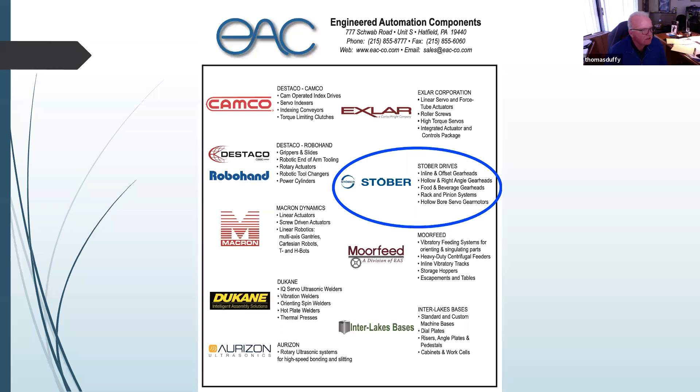The three principles right up on the screen, what you see now is my line card - these are the companies that we represent. We've been in the controls and automation business. I've been involved in it for the last 38 years, so we have a lot of expertise, and our expertise is in motion control, just as yours. I'm a mechanical engineer, we also have electrical engineers on board, but we bring the mechanical solutions to you to make your selling much more effective.

The first principle we're going to cover here is Stober drives, and Stober is an Encompass partner with Rockwell. They make a broad base of gear reducers - precision gear reducers, right angle, planetary, rack and pinion, and such. The neat thing is they make a very broad array of units, including our F-style, which is a parallel inline, offset inline - a really unique piece of equipment. We bring a very broad base to you, which allows you to solve all your applications, so we're looking to be your one-stop shop for solving your reductions.

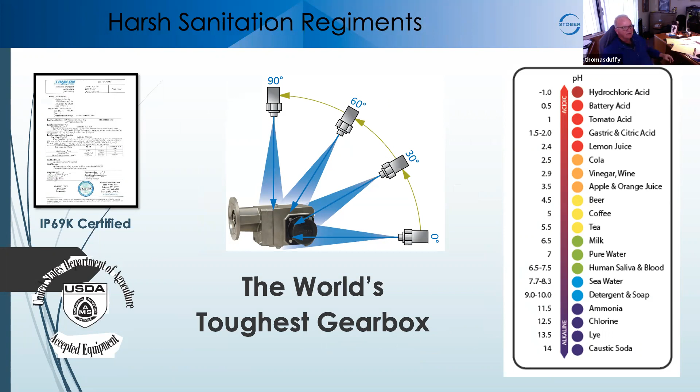We also make some special drives, which we'll get into - hollow bores and inline gear motors. One of the really great things about the Stober reducers is they're very tough, very industrial. They can take a lot of different harsh environments, including versions that are IP69K for food and wash down applications. We also put a bunch of different coatings on - our standard coating is non-wash down, but we also make corrosion resistant for nastier environments. Food duty is for severe wash downs, caustic sprays, and such.

We also make full stainless steel units. The interesting thing is we also get involved in explosion proof units. You don't normally think about reducers being explosion proof because mostly it's on the electrical end, but they're ATEX rated. They do come in handy - reducers can get very hot, very warm, and that's why we went out and got ratings. We do a lot of work in the process control industry - oil and gas, power generation, gas and oil transmission through pipelines - and they're looking for explosion proof, so Stober is a really good addition to your motors and drives for those industries.

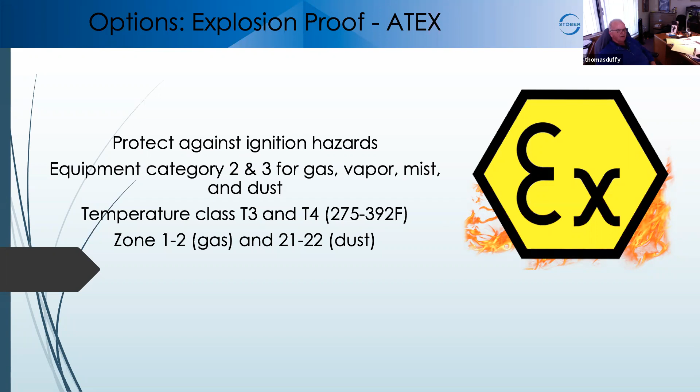They're very, very precise, very accurate. In a lot of cases, we're less than 1 arc minute of backlash, very high torque. We also have lower cost inline planetaries if you get into an economic situation, but they're really designed to be robust and tough.

We're the actuator of choice or the reducer of choice when they want long life, low cost of ownership is really what their mantra is. So we may be a couple more dollars on the front end, but we'll last a lot longer, and you'll see that when we show you our warranty at the end of this presentation.

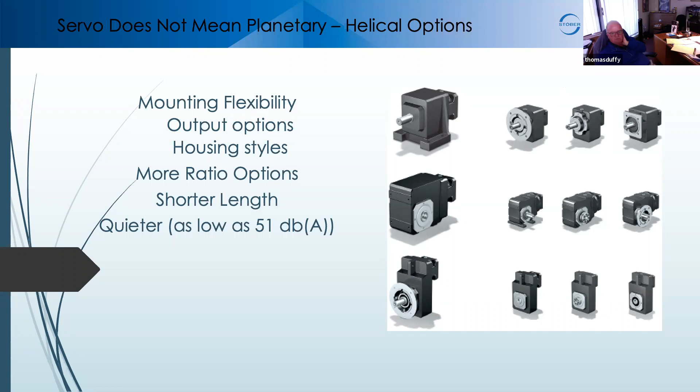We also supply full motors, hollow bore motors that work in conjunction with your Rockwell drives. So if you need to bring utilities through or you need a flange on the output, you can pass right through the center of our drive, and we have the feedback there. It'll show up just as a regular motor on your Rockwell configurations. We can do some interesting things with that, including putting a spindle through that hollow bore as well to make a linear actuator.

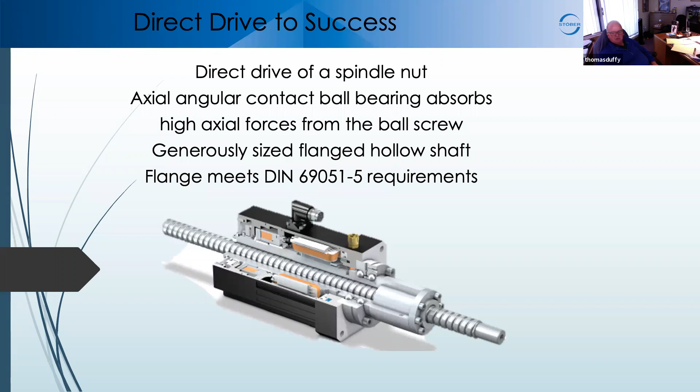Connectorized for your drives, the various drives, including single connector solutions.

This one you need to start thinking about. We make dynamic brakes for servo applications. So you have brakes on your motors, and the brakes on your motors work well, but they're for holding the load after the load is stopped. If you have a vertical load, in an emergency situation they may not stop that load. We put a brake right in line between the motor and the reducer, and that acts as a dynamic brake that'll stop the load under motion. It also becomes a really good redundant brake if you have a customer who's looking for redundant braking.

So we adapt to everybody's setup, giving you one partner, one vendor, one source for your gearbox and motors.

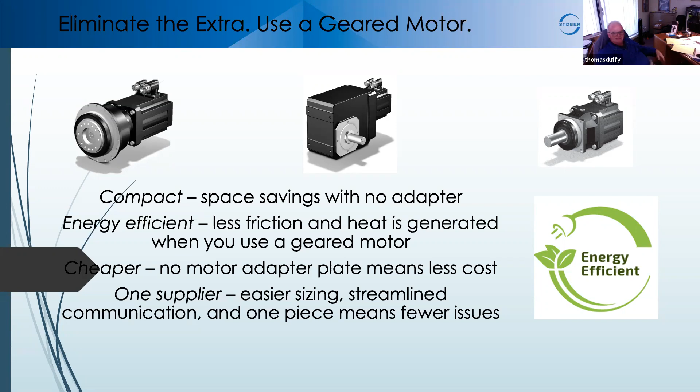The other thing we do is we make gear motors. The reason you would look at gear motors is they become very compact because we're eliminating basically two sets of bearings and two seals, since the motor and the reducer are all one. So they generate less friction and less heat. They eliminate the motor adapter, which reduces your cost, but most importantly, it shrinks the size of your package. That's the main reason people get into this.

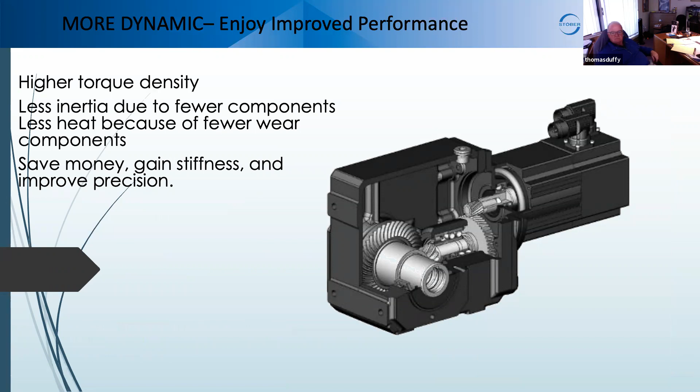Here's an idea, comparing a gear motor versus a gear reducer. You have your gear reducer and here's your gear motor, a much smaller package in length. In a lot of cases we can go in line. We also have a higher torque density, as you see, our pinion is right on the output shaft of the motor. We've eliminated the two bearings and the two seals, so the unit becomes stiffer, with better accuracies and less heat generation. As you'll see, it's much shorter in the package.

No more premature failure due to installation errors, and that's basically where you have problems, typically in the field, when someone's mounting a motor to a reducer. Here, this whole thing comes in as a package, so we guarantee the assembly put together.

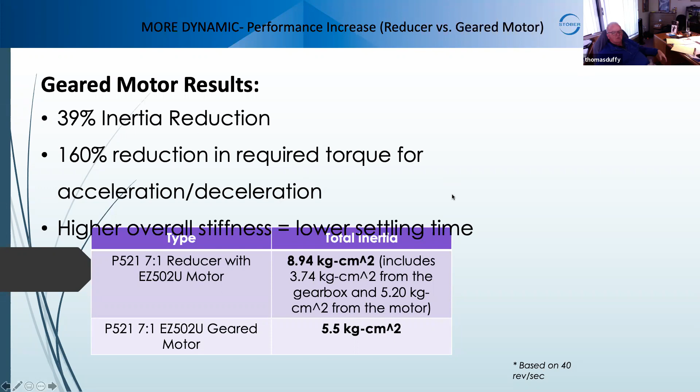Gear motor reduces bearings, lowers inertia. You get much better response without the reducers, bearings, and seals, especially for high speed applications that need quick response out of the motor. We achieve that with the gear motor, and since everything's bundled together, it's a stiffer package with lower settling time.

A lot of cases you'd go right angle in your reduction just to get the motor out of the way. With a gear motor, we're putting the gearing right on the motor. The motor gearbox length is about the same as the right angle, and you still have to put the motor down at the bottom, so it becomes a really nice package.

As I said before, we get the hollow bore, we put a ball screw, do a hollow bore with a flange, and then we can also couple to the ball screw.

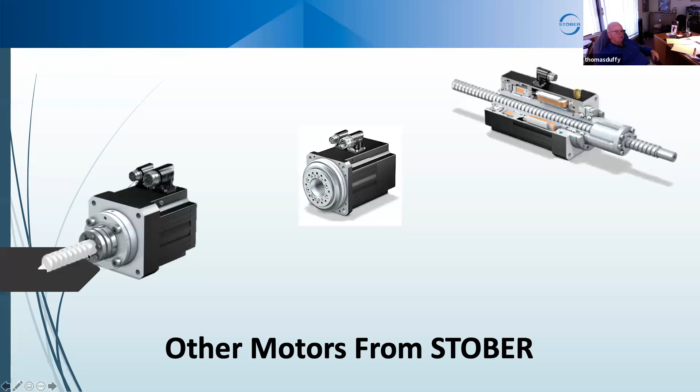And here's the reasons we just talked about: dynamic reduces your inertia, hollow bore lets you pass media through, compact design means smaller envelopes, and it's very stiff because everything's built right into the same package and easy to mount to. It's just a different brand for different applications.

Same thing we're talking about here. Stober also gets into rack and pinion systems with our motors. I'm going to show you a quick video of how this works with Stober, so just bear with me.

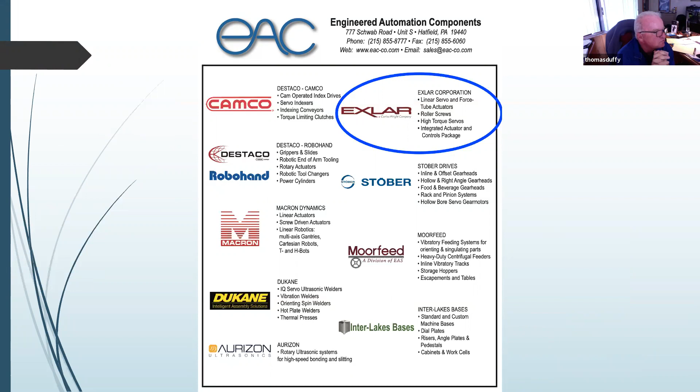All right, we're going to move along to our next one, which is Exlar. Exlar is a division of Curtiss Wright, the airplane and aerospace folks. Exlar makes linear actuators via roller screws, and we do some rotary too, but for the most part, we're known for our linear actuators.

A lot of you folks have probably heard of ball screws, where we use balls. We showed a bit of that with Stober, and they make a good solution for certain applications. A roller screw is going to give you a lot more thrust per package and a lot more thread contact. As you see on the screen, in the same area we're getting much higher thread contact than you will with balls. So we can put a lot more thrust in a smaller package, or get a lot longer life in the same size package.

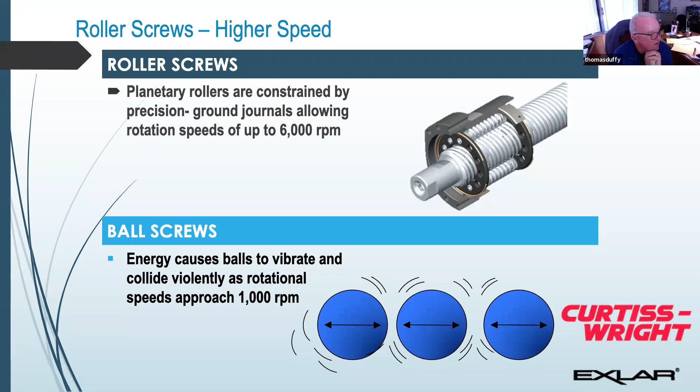A planetary roller screw is a series of planets that goes around a central screw, and the nut turns as well. The nut can either be the output, which we'll show you, or that center screw can be the output. There are two different versions: one's called an inverted roller screw, and the other one's a straight roller screw.

Our large actuators are what's called a commercial, standard roller screw, where we turn and move the nut in and out. This is our FTX series, which is the parallel mount. This is what we're showing here.

So your motor would get mounted at the top there, with a 1-to-1 or 2-to-1 belt drive. We also make them inline. So you see here on the screen the cutaway, the construction, with a large bearing support.

One of the challenges of any screw application, where Exlar has really made their name, is how it's packaged. Ball screw and roller screw technology has been around for decades, 40, 50, 60 years. The challenge really comes in how it's packaged, and Exlar has perfected the packaging of those screws. It really comes down to the bearing support, so you don't get too much whip.

So we go up to 48-inch stroke. They're packaged in housings, IP65, and we have some others that are IP67. They're epoxy coated. We also make some stainless steel versions, but we'll get into that. And then the rod is either a male or female output rod.

The FTX series is a modular series, one of our newer large actuator series. Everything is a bolt-on. We have the base actuator, we do an inline mount, we do a parallel mount, we can do front flanges. The mount I like best is a rear clevis to clevis.

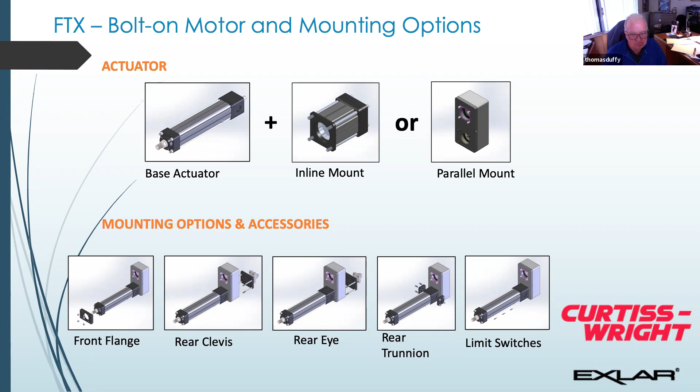Some of the applications, again, are heavy duty, heavy industry for the larger actuators. We do tube bending, a lot in the injection molding area, especially up in northwestern PA, where there's a lot of mold houses. We do a lot of moving of molds in and out, inserting and pulling, doing core pulls and such on injection molding. We'll move jigs and fixtures around, tire business, and we do a lot of presses.

We do a lot of pressing with the large actuators. Makes a great press. You're going to see your applications in pneumatic actuators, but more importantly, even hydraulic actuators. Hydraulics are great, but nobody likes them. Even the hydraulics guys don't like them because eventually they're all going to leak. That's just the nature of that beast.

Electric actuators don't leak, and it's great. Put a servo motor on it, you get complete control, you get complete feedback. The bulk of our applications are replacing hydraulic cylinders.

We also make that same series, we make what we call an FTP, and the reason being is a large percentage of our applications are for pressing, where we're pressing, we're forming, we're swaging. That's where a lot of these cylinders are used, and we're pressing things together. Same type of construction, except this housing is designed to allow us to have higher force in one direction.

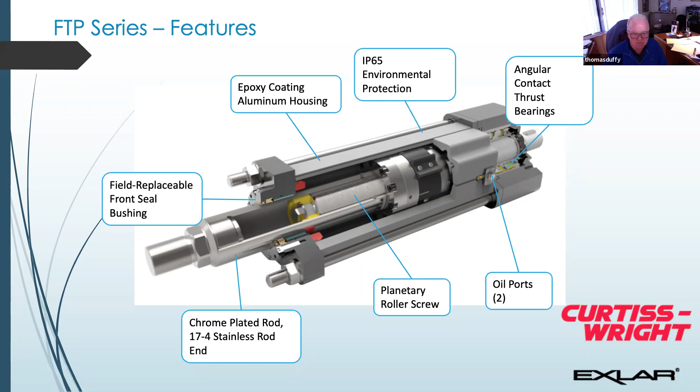Here's our press applications: pressing position, pressure shoulder, press to an external sensor. And the neat thing is, with all the electronics and the servo package you have, we have some algorithms worked up that we can work with you.

Whereas a hydraulic cylinder, typically we're pressing and you put a certain amount of hydraulic pressure in there and it's going to press that force. You don't know whether it's actually achieved that force or not, or whether you needed a tenth of that force to get there and you just use the rest of it to go.

With the electric and the feedback, you know not only what force you had, you also know what distance you pressed to. So you can now do a lot of quality assurance right on the application with your electric actuator. We know that even if the part wasn't there, we went too far and we haven't seen any force, we know that, and that's a feedback that they can get back from your system.

This is just a comparison. As you see in our ratings, we're 40,000 pounds, that's a continuous rating for our largest FTX. They go from about 5,000 to 40,000 pounds. We can actually generate about twice that force. Presses, we're 80,000 pounds, 45,000 pounds for presses. So again, we can handle some pretty big stuff.

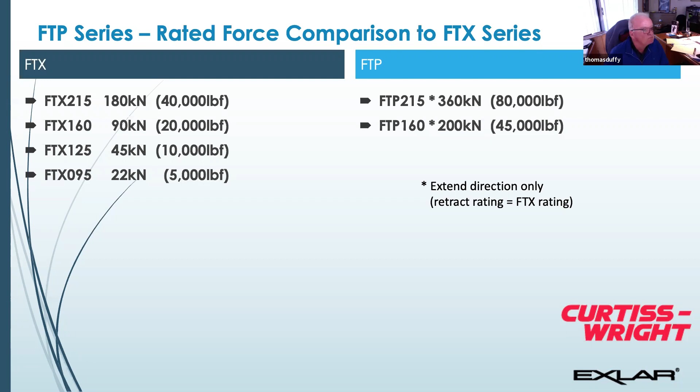The neat thing also doing electrically, we can synchronize or electronically gear a number of actuators together if we need to go into much higher forces. So that's the large series of linear actuators.

We also make, and this is another big portion of our business, integrated electric actuators. In other words, what we're doing is we're actually wrapping the motor around the screw. So it looks like a motor, it acts like a motor, it shows up on your system as one of your motors, but in fact, it's a linear actuator. It's moving in and out. It can move at very high speeds.

We have actuators that move up to 39 inches a second. We can produce up to about 20,000 pounds with this type of series. We can put multiple different types of feedback in the back end: we can do an absolute feedback, an incremental, or a resolver feedback on the back end. Again, the connectors are designed to match with your system so it shows up as one of your motors on your output.

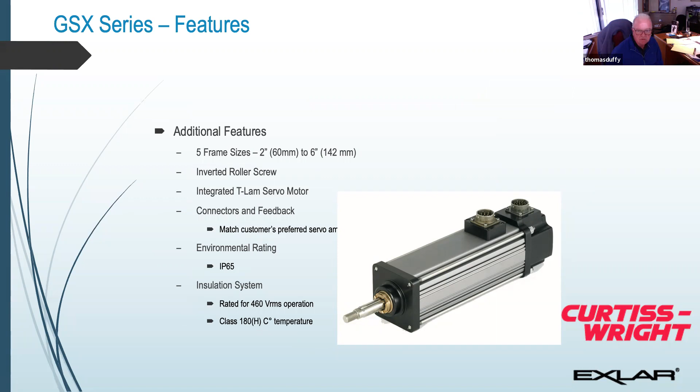We go frame size from 2-inch to 6-inch. Again, we're talking about the connectors. We've got IP65 rating and high temperature insulation as well. Some of the forces, we go from about 600 pounds up to 12,400. And actually this one maxes out at about 20,000 peak.

And you'll see speeds. We use these. This was developed actually. These are great pumps, positive displacement pumps for food, for very high viscous applications. It was actually developed for high viscous dairy pumping, yogurts, ricotta cheese, all that type. We're pumps. We're a pump. This one is developed as a pump.

It's very accurate. It's going to be within a thousandth of an inch per foot of stroke. So they're very accurate, very, very high speed. So you can change the volume on the fly doing this. There's a lot of different applications for these actuators. There are tens of thousands of these out in the field.

So we go standard voltages, 115, 230, 400, 460. Strokes, we go up to about 18 inches in the configured units. Different leads to match. We can do the same type of mounting options, front flange, rear clevis. We do rod ends and the connectors to match your servo drives.

So they would be Rockwell servo drives driving the Exlar actuators. There's some of the connectors that we do. We also do what we call an NPT fitting, which will allow, because we do a lot of these in the oil and gas industry. North of you guys are a great area for oil and gas, both in production and transmission. And we can make these with an explosion-proof rating.

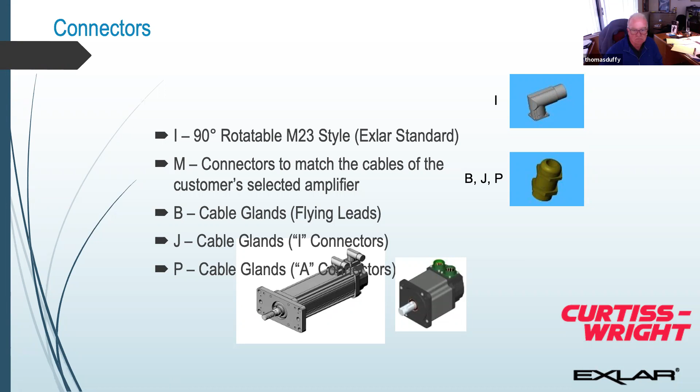Servo amplifiers, like we talked about a little bit with the feedback. We do Hall sensors, but typically on our lower end units. Resolvers, if you get a really robust, rugged application, we'll do a resolver, incremental encoder, or your absolute encoder. Again, these would match with your drive.

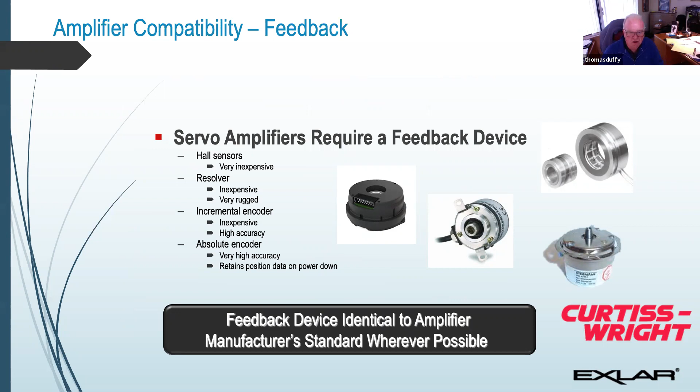GTX series is our new version of our integrated series. I'm going to fly through these a little bit, much shorter lead times because they're all modular. Same type of configuration and design. You'll notice just a single connector out there for your product. Modular, everything gets bolted on here.

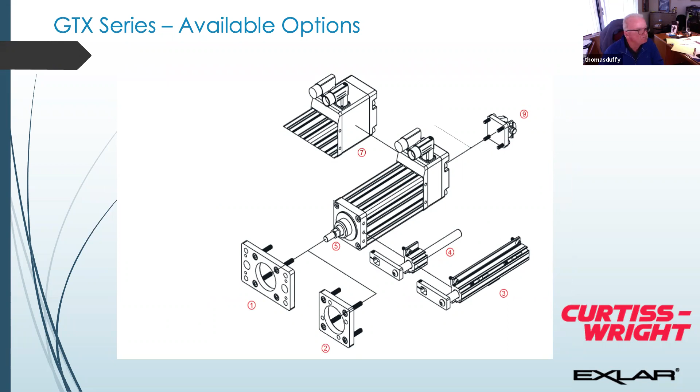Same type of thing. You get a base actuator with the feedback module, and then you can do your different mounting options. Front flange, which is very common, the rear clevis, anti-rotate.

We're a motor, so our shaft has to be confined. 90% of applications are already inherently anti-rotate. If for some reason yours isn't, we can put an anti-rotate system on there. It doesn't take much. I can take our biggest actuator, which is going to put out 20,000 pounds of force, and with my 2 fingers I can hold the shaft from rotating because they're extremely efficient.

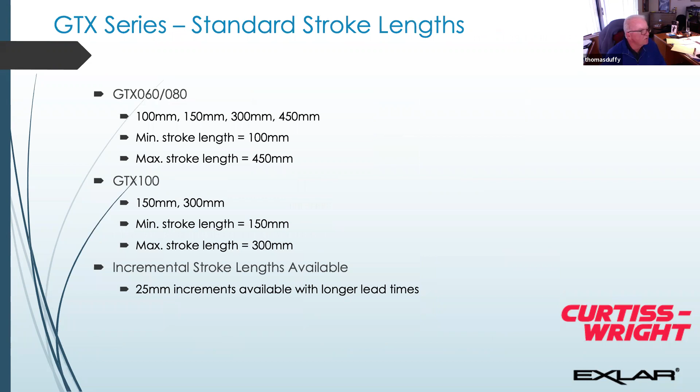They're about 93% efficient as far as the screws are concerned. There's our series of lengths. These are all metric, up to 450 millimeters.

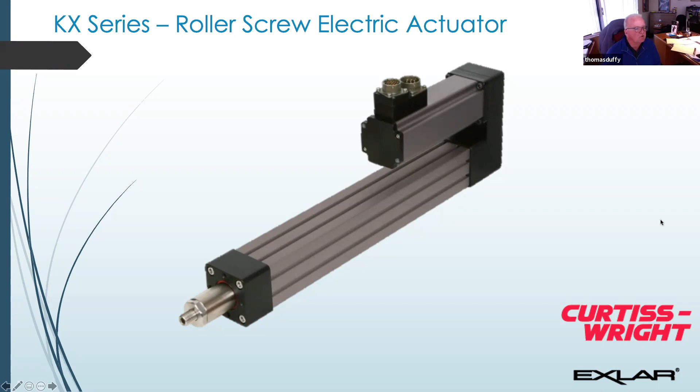This is compared to our existing product, our GSX product. And these are smaller actuators, smaller linear, but they're modular. We'd be using your motor. This would be your motor here on our KX series, so these are much smaller actuators. We go from a 60 millimeter frame, I'm going to show you 60 millimeter, 75 millimeter, and 90 millimeter frame. Smaller ones putting out 1,350 pounds, 2,500 pounds, and 3,500 pounds.

Again, still high speeds, guys. 33 inches a second, 20 inches a second, when they go up to a 48-inch stroke. These are really good for packaging machines and other general movements. Again, they're still accurate, within a thousandth of an inch per foot of accuracy.

But these would be using your motors, either mounted in a parallel configuration. Same type of construction, just smaller. Again, we would be either parallel mount or inline mount for you. Same type of configurations: front flange, rear clevis, side mount, side trunnion, which is nice, foot mount, angles. We do a lot of replacement of pneumatic actuators with these, where they want the electric.

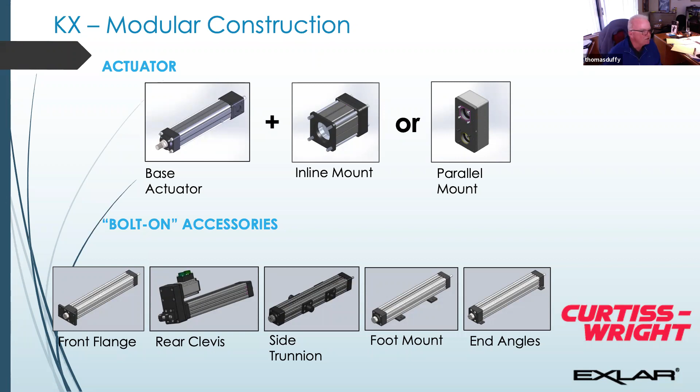They want that I to P. Instead of putting all the I to P and everything else on the pneumatics, they're going right, and we're putting your motor on here, and they have the electric control where they typically had pneumatics before. Now with the electric control, they get all the feedback, they get all the force, they get everything else that goes along with that, and they're not blowing air continually. It's much more efficient from a power consumption standpoint.

We also make a series, Exlar makes a series of integrated actuators. We have a lot of applications for this. It's basically the actuator and the control combined. It'd be like if you're probably familiar with integrated stepper motors where the control is built right on it. These were developed for very, very simple applications, going from point A to point B. We do some pressing with them.

Really where we use a lot of these is on valves and process control, water valves, dampers, process control, because when we talk about the multifunction, we can take an analog IO, we can take 0 to 10 volts, we can take -10 to +10, we can take 4 to 20 milliamp control. And that's really where these things live.

What's really popular is we can make these as AC or DC. The DC power, 12 volt, 48 volt - we do a lot of off-road vehicles, like New Holland that uses a lot of these to get rid of their hydraulics. They're putting these on their farm implements and gardening equipment, getting rid of the hydraulics, just doing electric. The 12 to 48 volt is a real hot item. People like it, it's easier to control.

We can also get them certifications for CE or CSA certified, explosion proof, and we're Class 1 Div 2, which we do a lot in. We have a number of these out in power plants in your area for doing valves, dampers, throttle control, because they can also do high speed control and very high accuracy.

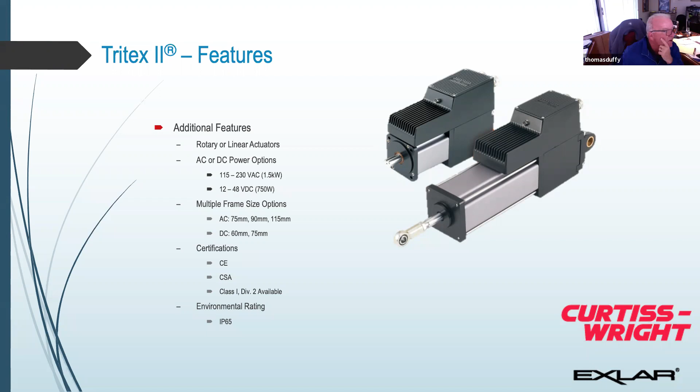Your gas transmission, oil transmission guys are hot and heavy into these too, because we take the technology we have in servo systems and bring it to that process world, which they're not used to. So we've got much better capacities, response and accuracies, but we're physically about a third the size of what they currently put in their systems. The service guys just absolutely love them, they just pick them up and go - they don't need an engine hoist to change an actuator out. What's nice is once you get in there, it's volume. There's just a ton of them out there.

Again, you've got DC and AC. They're not huge actuators, but they fit a really good mix in there. So we need simple control. We also make them as rotary, and we put them on our linear actuators because people like the simple analog control.

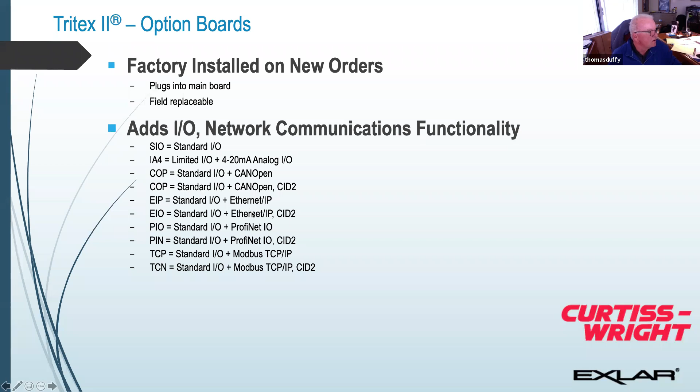This is where we're living, right here with the 4 to 20 control. We do CANopen, we can do Ethernet - do a lot of Ethernet control as well. The oil and gas guys really like them.

Same type of thing for feedback - Hall effect is the primary one, because again, we're not talking about the accuracy of your servo motors here. These are simple units.

Where Exlar has really done well is food processing. Everybody has it, no matter where you are in the country or really in the world, there's food processing. These are all customers of ours, all the big guys.

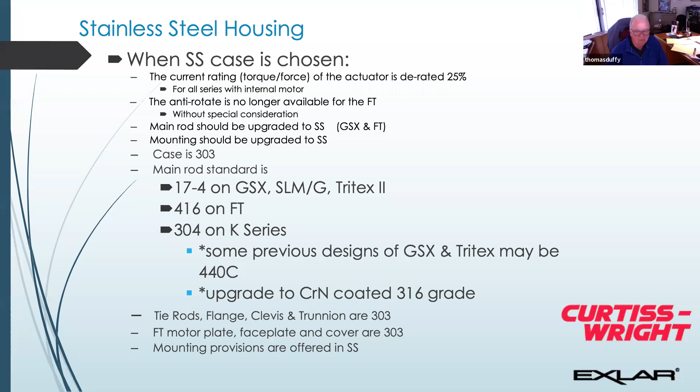We can do stainless steel housings, or epoxy coating, which is really a better way to go on most of those, because stainless steel doesn't dissipate heat very well. We'll also do stainless steel shafts. Again, we'll get them to IP65 rating - I have a couple out there actually rated IP69. Epoxy coating is a much better way to go, holds up better, and is much more reasonable. Smooth white epoxy is easier for wash down, and the housing dissipates heat so much better.

Again, we're doing a lot of pneumatic actuator replacement - the electric solution for the pneumatic. The nice thing is when you get into food and pharma, money becomes much less of an object at that point. They need a solution - they do not like the air in their plants. Number one, it's limited. Number two, it's very expensive.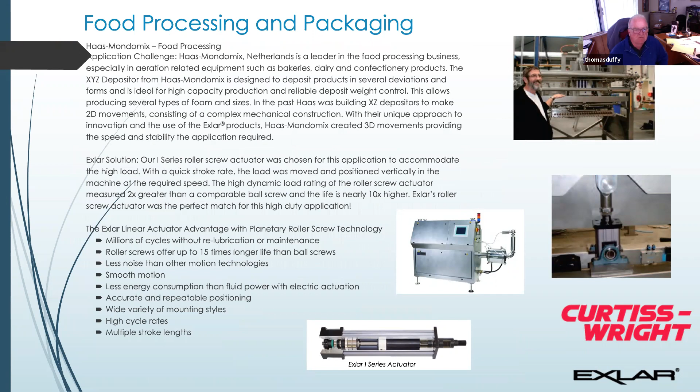We do a lot of different food processing. We're going to go through a couple slides to show some examples. This is where we really cut our teeth - Exlar was in liquid packaging, volumetric filling: milk, juice, yogurts, puddings, very heavy grease and lipstick, glues, paints, dental adhesive. I've got a couple applications right now doing that - it's like pushing concrete. But they're very accurate as pumps, very accurate, and they can be changed on the fly.

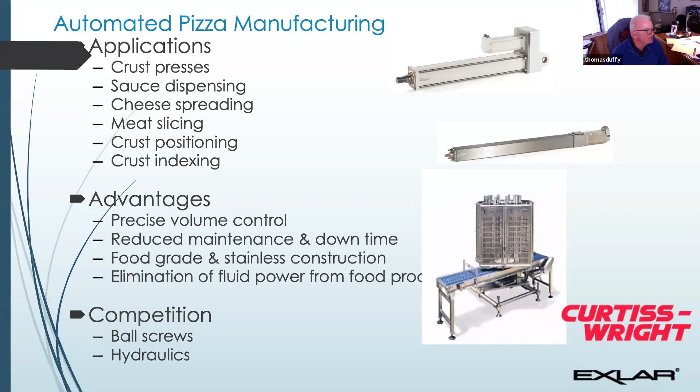Electric control. We make a lot of pizza crusts, tortilla shells, meat cutting, meat slicing. One you're going to see here in a minute that everybody loves is cheese cutting - cutting blocks of cheese, pushing a blade right through it, replacing ball screws and hydraulics. This is doing cakes and brownies and that kind of stuff, slicing.

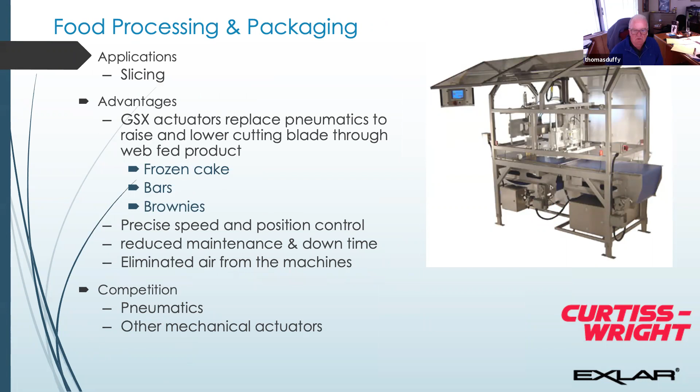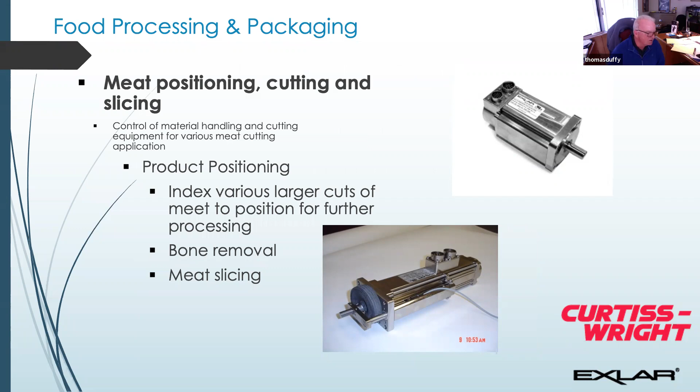I'm from the Philly area, so we do cheesesteaks too. We do all the machines and cutters for cutting the meat for cheesesteaks, and putting the interleaf in between there, along with other applications.

That is Exlar. Buddy, do you want to open up for any questions? Yes, if anyone has any questions, just click or enter it in the chat session and we can answer those. I flew through that, folks, so let me know if you need me to come back.

Tom, I did have a question. On a typical hydraulic retrofit, say you have a hydraulic cylinder at a certain pressure and force, is the physical size of the electric actuator comparable? Is it bigger or smaller to get the same amount of force? So here's what's going to happen.

We do a lot of this, Dale, and I've gotten my nose bloodied numerous times doing it. What happens is they'll give us a bore size and a pressure, and we calculate from there. It's typically grossly oversized if we do that. We'll supply that with the proviso that if they're doing multiple units, we advise doing one first. As soon as we put the electric solution in with your motor and drive, your current draw tells us the force. We find out what the force actually is, and then we right-size the actuator. Typically we're going to be a couple sizes smaller than what they'd be hydraulically, physically.

The problem is hydraulics are typically anywhere from about 40 to 60% efficient, where we're in the 90-some percent efficient range. I could see that if you're working with an OEM trying to make a design decision, all of a sudden he can save space on his machine when building it if he flips over to an electric actuator.

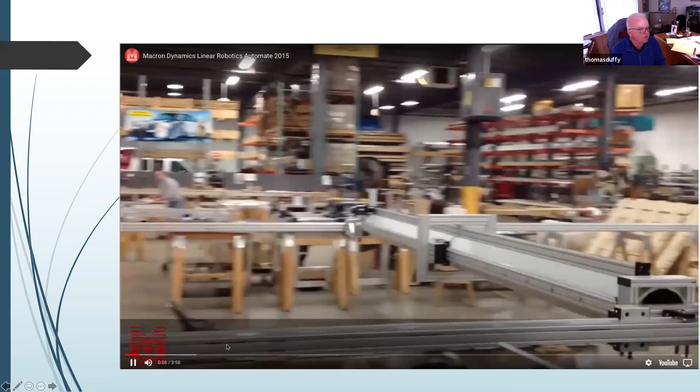We're going to move on to Macron Dynamics, which is a gantry system. I'm going to start a quick video here, and then we'll jump right into it because this video is long, but it gives you an idea of what they do. I'm going to talk over it a little bit. We're doing gantry systems, single axis, multi-axis. They do large, they do small, high speed, low speed, and we're fabricating. I'm going to jump through this a little bit, guys.

And these are all fabricated. They're made in Pennsylvania, fabricated here. This one, we're actually picking off bad pecans on a moving line. With this pick and place unit, we can do up to 10 picks a second.

You're going to be surprised at how inexpensive these types of packages are. Again, they're using your servos.

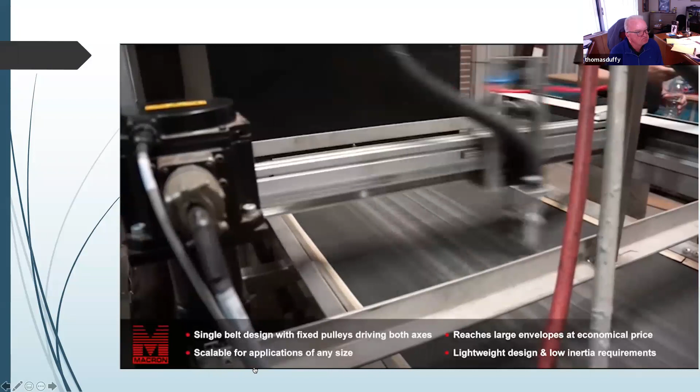So Tom, do they typically tell you the design criteria you need and then... I'm sorry buddy, I'm having trouble, I'm hearing the music behind me. Sorry, hang on, let me stop this for a second.

Yeah buddy, your question? Do they typically give you the design criteria and then you put it together? Macron will put the multi-axis system together and then we'll work with you on sizing the motors. You already have the algorithms in your Rockwell system to do the sizing. Then if it's a multi-axis package, that gets packaged and fabricated by Macron and shipped as a package. But we're going to show you both the single axis and multi-axis systems.

Let me move on here a little bit. Let me show you some pecans being picked.

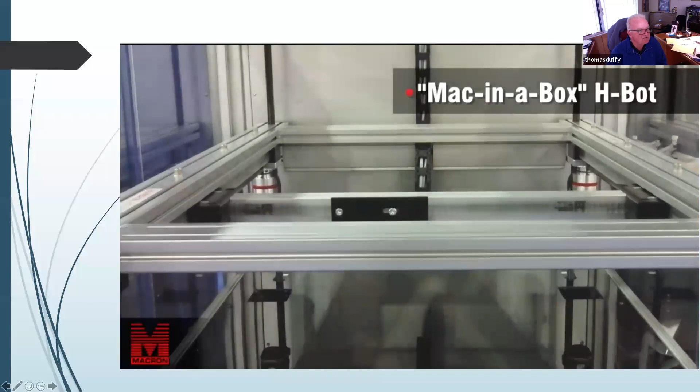Again, the same thing, 2-axis. We call it Mac in a box. These systems ship in a week to 10 days. They're pretty quick, so we can do an X, Y, and a Z here.

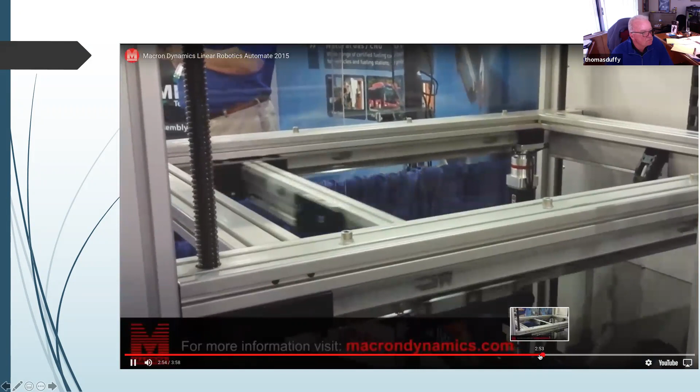I'll jump ahead a little bit, guys, not to bore you. I'm going to show you some motion, but I don't want to bore you. Let me go back just a hair.

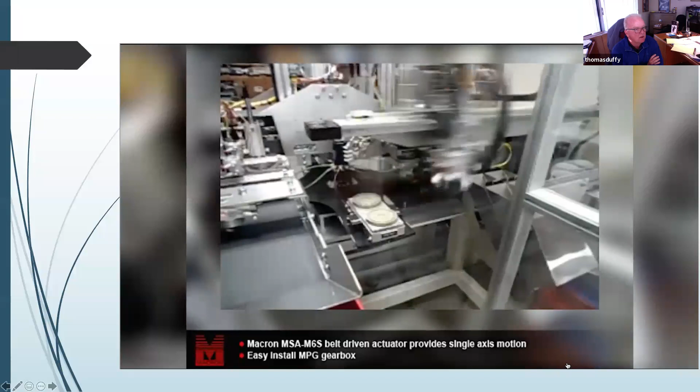This is just a fabricated pick and place. High speed, high repeatability. It's got high repeatability, not necessarily accuracy, but very high repeatability. We're going to show you some of that in the robot controls that we do.

I think that's it for there. Let's go to the next slide.

Okay, so again, Macron is just outside of Philadelphia. It's privately owned, been in business for 30 years. Actually, the owner and founder of it and I went to engineering school together, so I know Tony very well. Single axis, 7-day lead times.

We're shipping things in 2-3 days, guys. We're fabricating, it's just amazing. We can do multi-axis systems. They'll do the complete mechanical solution for you. We'll help you with the motor sizing and gearing, we can supply the gear head right on there. A lot of times we're putting a Stober reducer on there to get a little bit better reducers on there. And the configuration we'll give you.

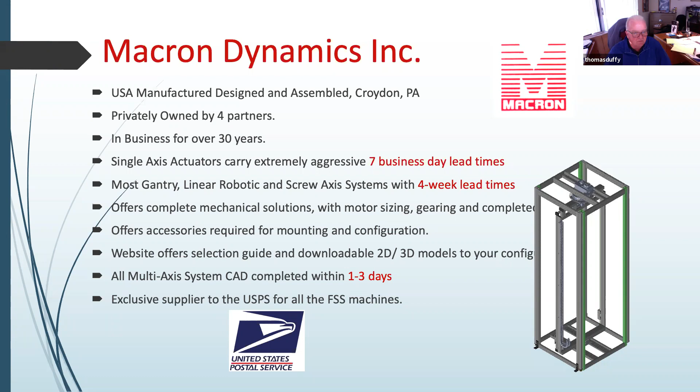In fact, I just quoted a couple this morning where with their custom application, they did the drawing already. We supplied the drawing and everything's done very quickly, very competently. They are the exclusive supplier to the U.S. Postal Service for all their postal facilities. They've shipped tens of thousands, even 30s of thousands of actuators for package control. We'll get into that a little bit here in a bit.

Okay, single axis - they do single axis where this is the basic anatomy of this thing. It's a belt drive. You've got a belt in the center, you've got the cart, you've got a pulley system with the gearbox on there. But the key is they have their own custom structural beams, and then they also cast the ends.

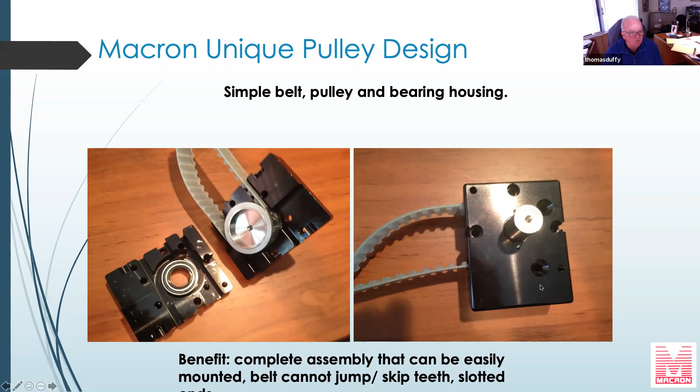The key to this whole system and the success - it's been a very successful system - is their pulley, what they call the return end. One of the real keys is that the pulley and the shaft are all machined out of one component. Therefore we're guaranteed alignment. These two halves push together, and as we get into it you'll see it becomes a very tight system. And we have a way of eliminating the dirt as well off the package.

They make their own belt - well, we have their own belts made for them. And one of the unique things is when you tension the belt correctly, the Macron logo gets blurred. That's how you know it's tensioned correctly. And they're very taut.

We can do different types of bearing supports on these actuators. I'm going to flip to the next screen. We go up to 500 foot of stroke. We've actually done actuators that are closer to 1,000 feet in stroke.

We have a couple for that. We were doing cameras, moving cameras back and forth along a plant. We do some screw actuators, really known for our belts. Typically we're doing the screws when it's a secondary axis for us. We do small axes, really small actuators, which we'll show you.

We have a bunch of stainless steel IP69K solutions, which we'll be talking about. We also make a thruster, I have a small video on that. It's a neat, unique application which I'm sure you've seen all over the place. Good alternative to pneumatic actuators. We'll make a telescoping unit, talk about claws, which is our emergency device, and then some of our other specialty products.

These are examples of our single axis, where we have a single axis with just a belt and a bearing. We have a single bearing. We can do an offset, a much heavier bearing if you have a bigger moment load.

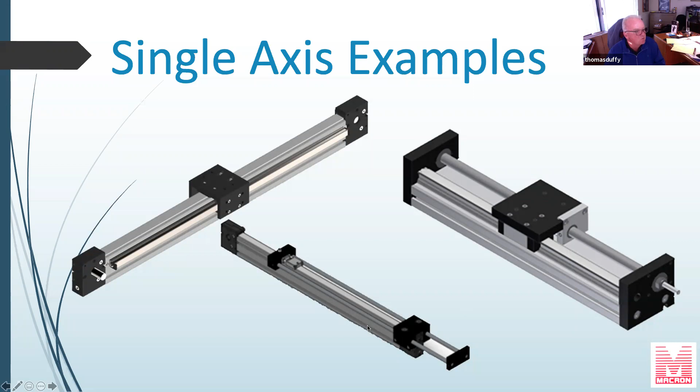We also make what we call a thruster, and I'm going to show you. This is a quick video of a thruster.

Those yellow boxes are what we're replacing with this last actuator here. We're not generating any force, we're just pushing it out of the way, and it's at very high speed, so they work very well.

As I mentioned, we do screw tables. We don't do a lot, but we do screw tables if you need a ball screw or whatever. Typically we're using this for a second axis, typically a vertical axis where you want a screw rather than a belt.

Talked about stainless steel actuators. These are used a lot in the food industry and pharma industry, IP69K. Again, the total structure is wide open, everything, it's really great for wash down. It's very easy to keep clean. Food and pharma guys love us for that.

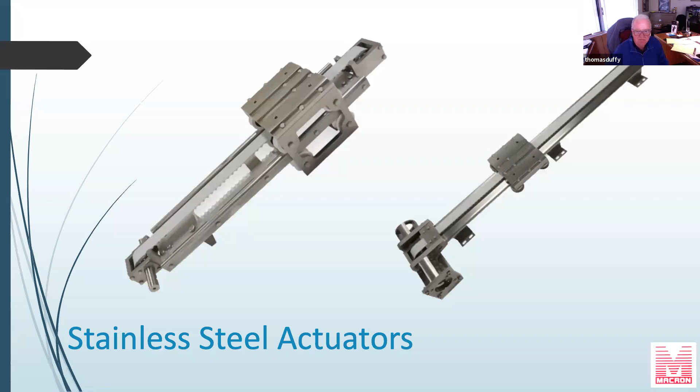Everything's got stainless steel hardware, sealed belts, stainless steel pulleys and bearings. Everything's anodized for the wash down. So it covers a number of different food and pharma applications.

Telescoping units, I had a video on this, it's not working real well, but anyway. If you look over here, these actually telescope and the beam moves in and out. I've used this for loading and unloading presses, a couple of 100-ton presses. Take a piece of sheet metal, move it into a press, get out of the way, the press comes in, we go in and pick the part out.

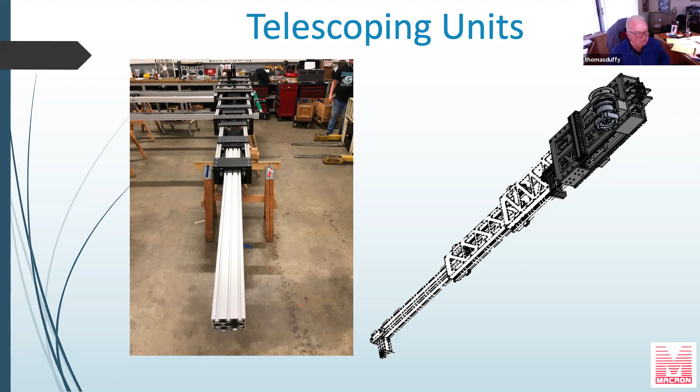So we can telescope and reach in, you can reach in 6-8 feet and then come out. Just different applications. What we call the Omega drive, where we actually keep the motor stationary and the beam moves up and down. This block here gets mounted to a fixed position and this beam moves up and down. Great for picking and placing. We do a lot of that on our Z axis, our vertical axes.

Multiple axis, we have T-bots, I'll show you those in a second. This is what an XY table looks like. We have what we call a double X, X-X prime, and a Y. And then we're doing a Z as well here with separate axes.

These units, the T-bots and the H-bots, and even the tri-bot, are all single belt, dual motor. As kids, if you remember Etch-a-Sketch, where you had the two knobs and you could make the thing move all over and draw really neat pictures. I always struggled with it, but you can make different pictures with it. When you're done, you shake it loose.

That's the same thing, it's one belt but two knobs. So if you turn the motors in the same direction, it moves in the X direction. If you turn them in opposite directions, it moves in the Y direction. Don't get too concerned, your Rockwell controller has the algorithm for being able to control these actuators. The neat thing is we're not moving the motors, all we're moving is the carriage.

When we saw that Pecan pick and place, that's an H-bot. It's capable of very high speeds because all we're moving is the carriage, we don't have to move a motor for that second axis.

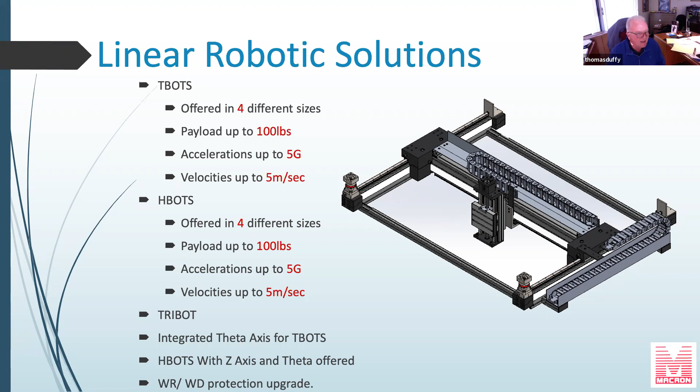We go XX. So XX, which we saw here, is the one you saw here. That's an XX system, an X and X prime. We also do an XY cantilever.

Yeah, stainless steel, same thing. Let me just jump through here. So here's an X, a dual X axis, we call it X and X prime. So you have two carriages, and we can also put two carriages on each belt if we need to handle a bigger load.

This is an X and a Z, and the Z, the beam is moving up and down. So we're going in as a pick and place. You can do palletizing, we do whatever, telescoping Z.

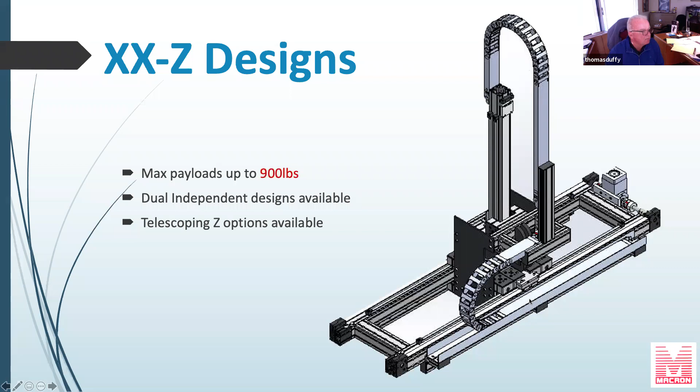Same thing, an XZ, but this is a cantilever. We're hanging out to one side. This is typically lighter loads.

XYZ, XX, YY, and the Z in the middle. This we're handling, again, larger loads, larger payloads.

The neat thing is everything comes assembled. All the wireways are already there for carrying. Everything's already done, complete. All you're doing is mounting your motors to the package.

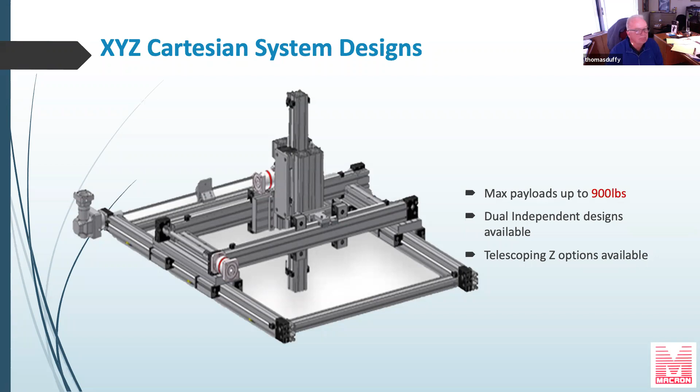This is relatively new. We make a theta, so we can make a rotary unit at the end of that gantry. So we can do X, Y, Z, and theta, or any combination in between there.

This gives you an idea of some of the larger gantries that we would do. This would be an XX system with a Z and an X, Y, Z.

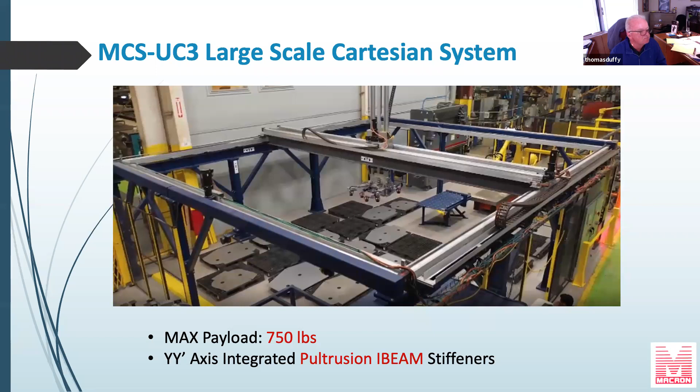We also do these where we have two independent gantries. So we have an X prime in the same space, and these two occupy, well, not the exact same space, but they can run independently of each other. So you can have two heads if you're doing a pick and place.

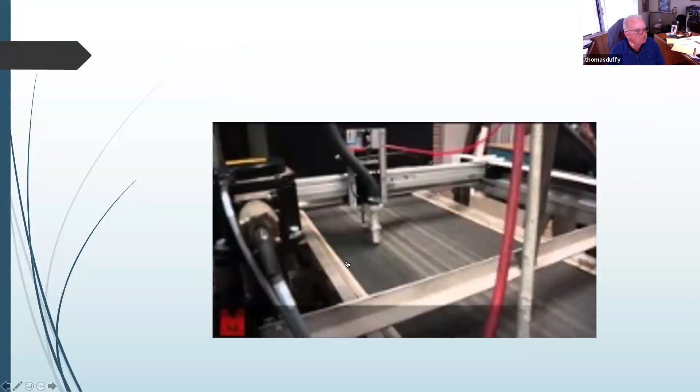Okay, these are the H-bot and the T-bot. So when we talked about two motors, one belt, the T-bot is the vertical version. This is the same thing I'm going to show you with that Pecan. This is an H-bot, capable of very, very high speeds.

All right, we don't shut that off here.

And then we also saw in the very beginning the large gantries. We can do very large systems as well, very large packages. You know, there's a Delta robot out there.

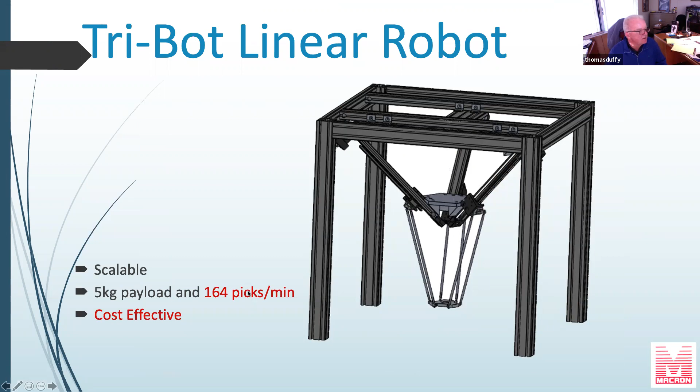We also make one, which we call a Tri-Bot linear, where we're doing the same thing, except we've got 3 belts in here. You can do 160 picks a minute, 5-kilogram payload. I have not done one of those yet, but they're out there. I've seen them run in the shop.

This is one of our in-between units, fits in between our two smaller ones. Again, 2 motors, 1 belt.

This one we're really interested in. This is, you see a target price of 2,000 for this XY system. This is one of those H-bots. You put 2 motors on there. So it's 2,000 without your motors and drives, but it makes a very cost-effective, very high-speed capability.

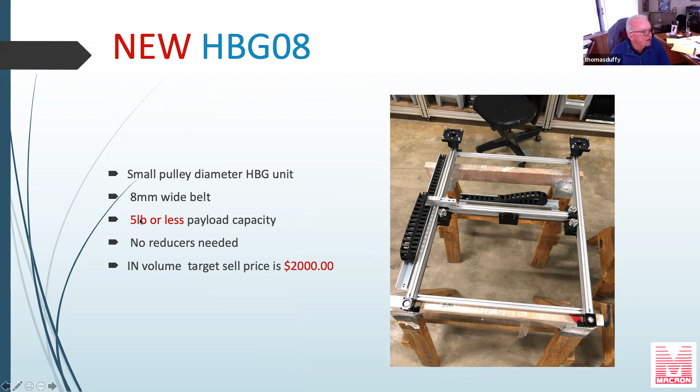Again, we're handling less than 5 pounds. Could very well be for a lot of your heads. We'll custom configure them on an XY on a mount, different mount. We do this whole mount setup for you.

Robot transfer units. We're going to talk a little bit about these. This is a big business. It's a great business. We do a bunch of them out in the Pittsburgh area, to be honest with you folks.

The various different sizes will mate. We're the 7th axis on most of these robots, maybe Scara, Fanuc, Kuka, even the universal ones. We have standard mounts for their units.

You've got the X and the X prime. Very heavy bearing capacities. Cableways always built in there with a reducer and a single motor in the middle.

These are very popular, very popular. You can put 2 of them on the same unit, 2 independent controls. We also make them where we have a counterbalance. This is actually one that's a universal robot that's a counterbalance, so we can put on a vertical.

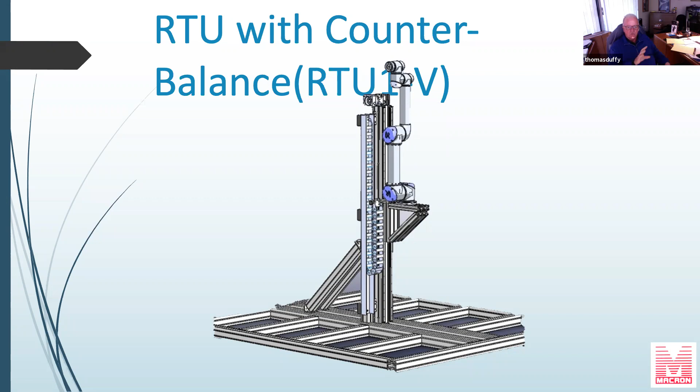One of our customers out in the Pittsburgh area actually takes our RTU, mounts it on the wall, like it has a robot that's working, almost looks like a chalkboard. We can mount it horizontal. We can actually hang them from the ceiling if need be.

I'm going to show you a video of it, the RTU. This is one of our bigger ones, but it gives you an idea of the speed and the capacity.

So what happens here is they'll run them, they'll have one robot, but they'll have multiple cells, and the one robot will service multiple cells. And it'll shift in between the cells. Very high speed. We're seeing repeatabilities to within a couple thousandths.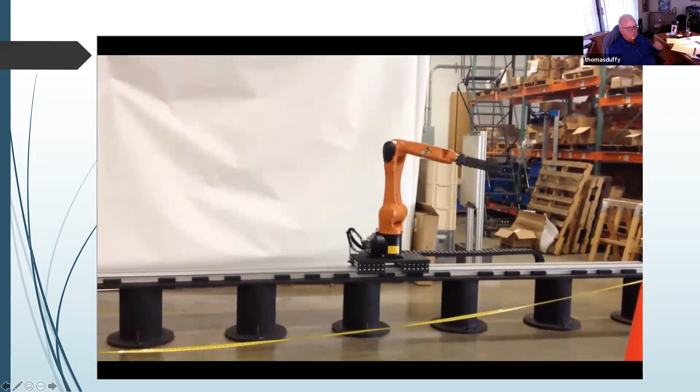Again, very popular in the robot industry. So all your robot integrators, they're out there and they're buying the RTUs.

Slide here, we saw this at the beginning. This is a theta with a vertical. What they're pitching here is we'll do the whole frame assembly for you, 30 foot tall in this case.

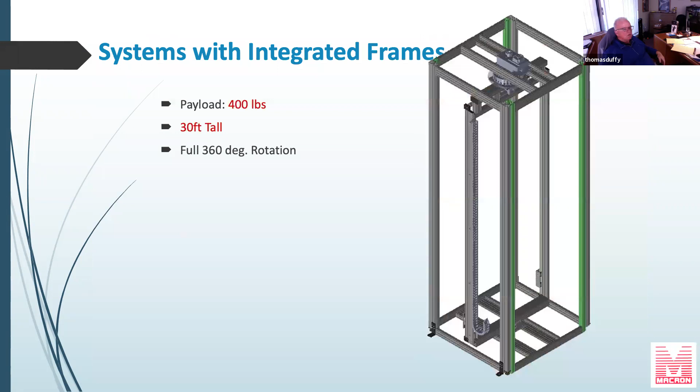With belt actuators, everybody's always concerned: if you do a belt actuator on a vertical, what if the belt snaps? We have a solution for that, called CLAWS. It sits between the two, and if we detect a release, the CLAWS immediately activates and grabs the whole thing, stopping it like a brake. So it's a vertical brake.

We also supply all the accessories - sensors, framing, tensioning tools, all that kind of good stuff.

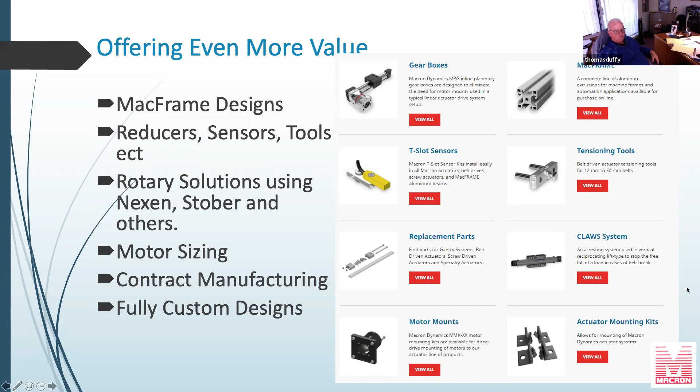Any questions on that, Macron? Buddy, we all right? Yes, I was just taking myself off mute. Yes, I think we're good there.

If someone has a question, please take yourself off mute. Again, this is all custom, folks, so we can make any custom gantry you're looking for us to make.

The last one I surprised Buddy with this morning, I'm going to show you really quickly because it's something that was just presented to us and it fits your industry pretty well. For all these gantry systems and robots, the real challenge is doing the end effector. We work with a company called Zimmer Group, who makes custom end effectors.

We've been working with a guy there for a long time - he just moved here. They've got tremendous capability, but one particular thing is extremely interesting. We're working with them on custom end effectors, where they'll fabricate one for you. The one that really triggered me was for you folks out in the steel industry.

I'm going to show you this video. Their product can handle the high temperatures of forging, and the weight - you can see the size of that robot - and they can handle the temperature. So if anyone in your steel industries or foundries is looking for electric or pneumatic end effectors that can deal with heat, these guys can certainly do it.

I've never seen anybody else able to do that - we've always had a challenge there. These guys have solved the issues, and they're going up to almost 2,200 degrees Fahrenheit for their systems.

They have a bunch of different ones for foundries handling sand, and they do a lot in the automotive industry, including investment casting. We do small work with them, but they also do these large custom end effectors. It's a niche that fits where you folks are, with a lot of big, heavy, sometimes hot applications. So anyway, that's who we are.

That's what we do. Anybody have any questions?

Buddy, I think I came in just under an hour for you. Yeah, it's 11:02, so I must have been doing this for a while. So anyway, any questions I can answer for anybody? Anything going on?